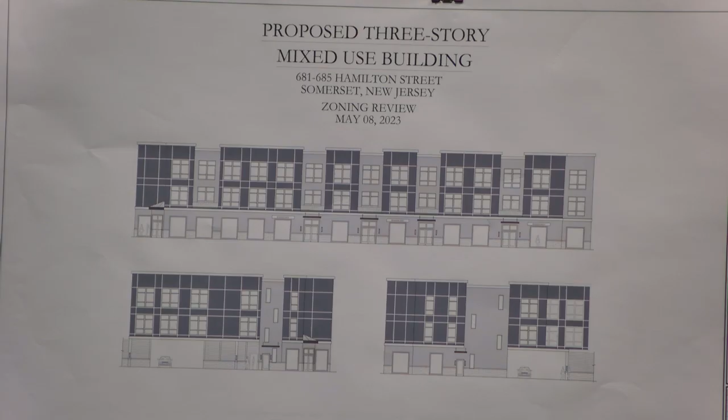Let me pause there for stormwater utility improvements. One of the reasons it took a long time to get here was that my client and his engineer worked very closely with your staff and engineer to hopefully resolve an off-site stormwater management problem, and we think we've done it. The hearing was deferred until we took care of that, and I believe we have.

The applicant is also seeking 2 bulk variances, the first for parking lot setback. The zone requires a parking lot setback of 20 feet. It varies with respect to the site constraints that we have, and I think it goes down, at at least one point of the property, to 0.5 feet.

We're also seeking a C variance, or bulk variance, for the buffering requirements from Schedule 6. That requires screening on the north side of the property, which abuts a residential property boundary, and you need at least 5 feet in width. We simply don't have the room, and you'll hear testimony from our planner.

I intend to introduce 3 witnesses tonight. My first witness will be Ashraf Ragab. He's from Amarch Design Studio, and he's the applicant's architect. He has a digital presentation of about 7 sheets, which we'll mark as Exhibit A1 when we get there.

It includes what we believe Mr. Healy wanted with respect to a 3-dimensional view, a rendering if you will. That's a portion of the plans. It's absolutely similar to the plans on file, floor plans and elevations, except we were going to eliminate an elevator, but we're putting it back in because of ADA requirements. You'll hear from Ashraf on that issue.

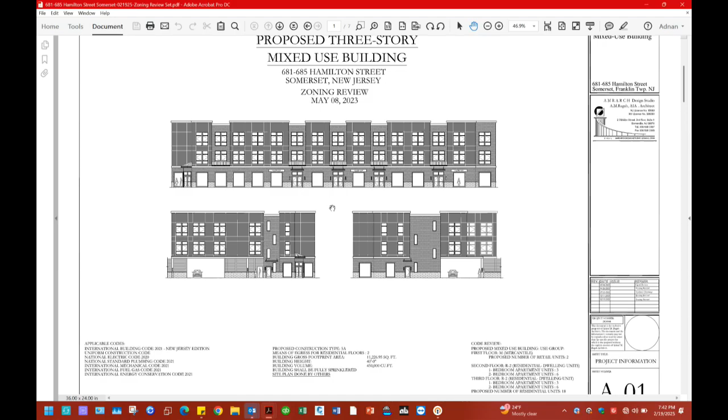Ashraf, you've indicated you prepared this. How would you characterize Exhibit A1? These are the set that was submitted to the board for review, with the exception of the renderings, which were added in the last two sheets as requested by the planner review. There was one change we'll ask to be disregarded, the elevator. The elevator had been removed from these plans, but it will go back. So we are reverting to the original plans that were submitted, there will be no change in them. So to clarify, but for the renderings attached to this exhibit, everything else is the same and has been on file with the board? Yes.

So the building is a 3-story mixed-use building with retail and parking on the ground floor. There's a retail strip along Hamilton Street and a main entrance for the building. Behind the retail, there is a parking lot with spots for the residential units. There is an entrance from the parking lot into the lobby area, actually, from the parking lot you would have to go around to get into the lobby. There are also bike racks required by the township in the parking area.

There are 2 retail spaces facing Hamilton Street, and on the corner of Hamilton and the avenue is the entrance on a diagonal 45. Mr. Ragab, if you could refer to what page you're on as you move through A1. I'm on page A02. Perfect, thank you, I just want to make it easier for everybody to follow.

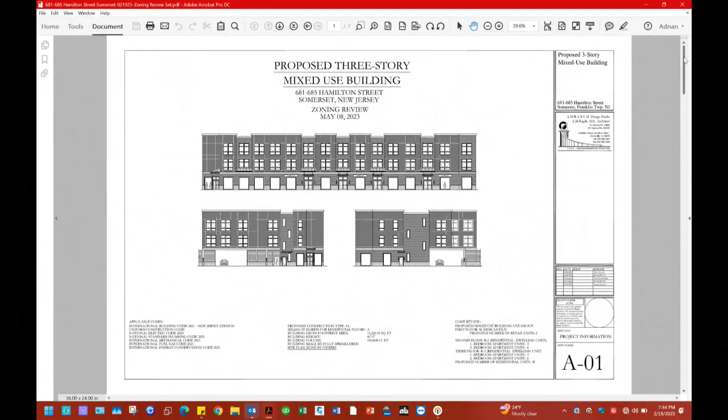The ground floor plan, that pretty much covered the ground floor. There are 2 staircases that go up all the way to the 3rd floor, and again the elevator will be there in the lobby. There is a trash room facing the parking lot that receives trash from a chute going up to the upper floors, accessible from the parking area. There is a sprinkler slash mechanical room accessible from the lobby. There's also a package room and a laundry room, common for the whole building, facing Hamilton Street, accessible also from the lobby. The rest of the ground floor is the two commercial spaces. They're not designed for any particular use, pretty much vanilla boxes at this point, TBD on the tenant.

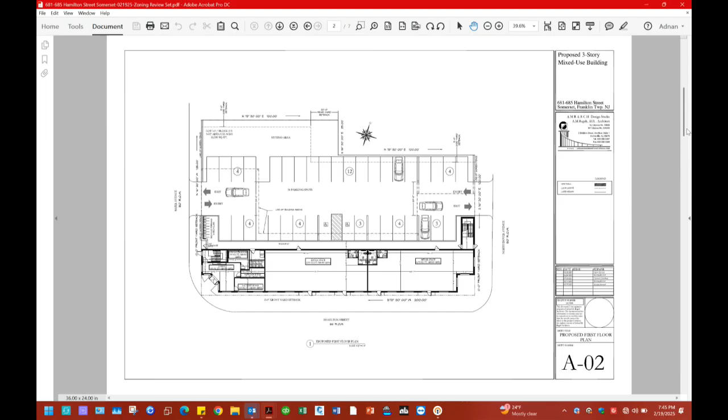Okay, you want to identify what you're referring to next? Sheet A3, A-03, which is the second and third floor plans. They're pretty typical, there's a single load corridor facing the parking lot along the L shape of the building, and it accesses all the apartments. There is a mix of 1 and 2 bedroom apartments, and again the elevator and the 2 staircases, one staircase at each end of that hallway. They're typical apartments, we try to make all units have a street view or exterior view from all the rooms, except maybe one exception. All living spaces and bedrooms are required to have windows, and the living spaces all have windows. Along Hamilton Street all living rooms have window access on Hamilton. Along the sides there's only 1 unit tucked into the corner where the living spaces are windowless, but the bedrooms have a view on Bear.

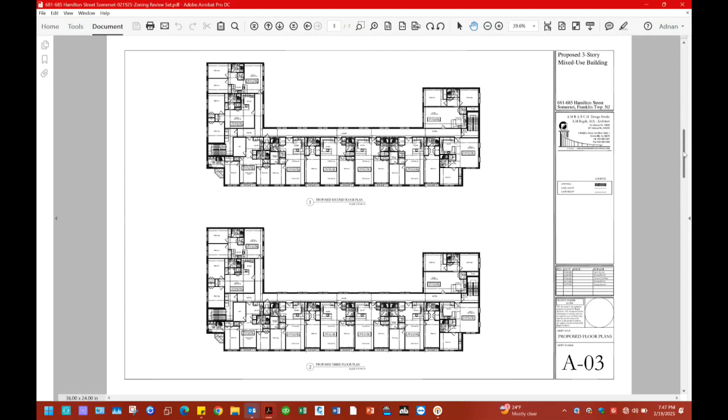Now we're moving to A-04, which is the elevations. There are retail storefronts along Hamilton with entrances for the commercial spaces and the building. We try to abide by the redevelopment zone standards for the elevations, the height, the changes in the parapet, so as to not create a single height building. We are using 3 materials as stipulated by the redevelopment zone: brick, cement fiber panels, and some stone at the bottom as a base. The elevations are consistent all around, there's not much change in material or color from all 4 sides, also as stipulated by the redevelopment zone. We are screening the parking lot at the ground floor with a masonry wall about 3.5 to 4 feet high, and the rest with slats that are semi-transparent, so you can see inside the parking lot, but it is screened for security.

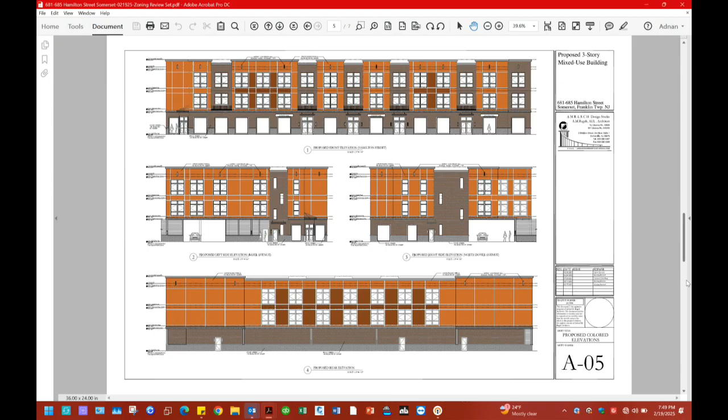Sheets A-6 and A-7 are color renderings, requested both by Mr. Mazzai, the board's consulting engineer, and Mr. Healy, the board planner. They show the massing of the building along Hamilton and along the two side streets, and also the parking in the back. The parking entrances and exits are side to side along the two side streets, and there is two-way traffic from Bayer to North Dover, with perpendicular parking on both sides.

And the parking is screened all around. There's going to be a solid fence. The site engineer will testify to that on the back of the property, and the screening is along the two sides from the street sides.

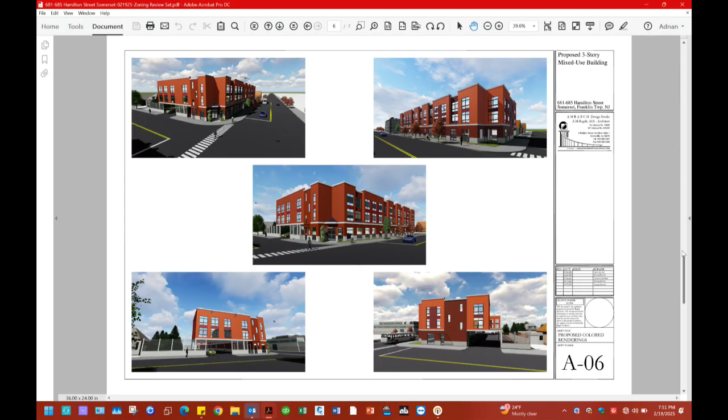How does this compare, the projections that you've just indicated on A-06, how does this compare to the remainder of the HBD district? Are these better presentations? We'd like to be, we're trying to be consistent with the HBD regulations.

A-7 are just additional renderings. In the parking lot, there's an aerial view of the building showing the parking in the back of it. And also there is a street view of the facade along Hamilton.

Mr. Ragab, are you familiar in your capacity as the applicant's architect with the Hamilton Street Design Standards? I believe so, yes. And do you believe that the presentation you're making tonight and the plans on record are consistent with the Hamilton Street Design Standards? Yes, and we are willing to add whatever enhancements will be requested. So we will be asking for no waivers in terms of the HBD standards.

All right, and these were referenced in comment number 2 to Mr. Healy's February 4th, 2025 memorandum. Is that correct? That's correct. Now, what about his comments with respect to architecture on page 4, the elevations, the screening wall design, and the attached light fixtures?

Sure. We're now referring to Mr. Healy's February 4th, 2025 memorandum, specifically on page 4, beginning with his other comments.

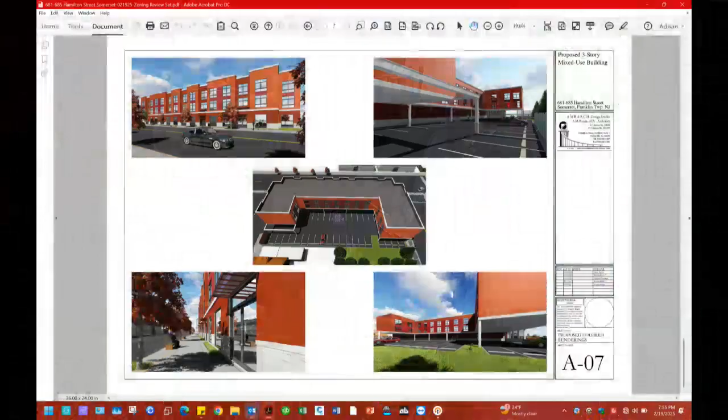And the applicant would like to defer a decision later as to whether they would actually install solar panels. It would depend on a number of factors that may exist in the future. Yes, the roof will be ready for solar panel installations. It will be a decision of the owner to install them.

All right, once again, Exhibit A1 is exactly the plans that are on file with the board, except it did not show an elevator, and we're now reinstating the elevator. That's correct, because of the ADA requirements. Yes. Okay, I have no further questions of this witness.

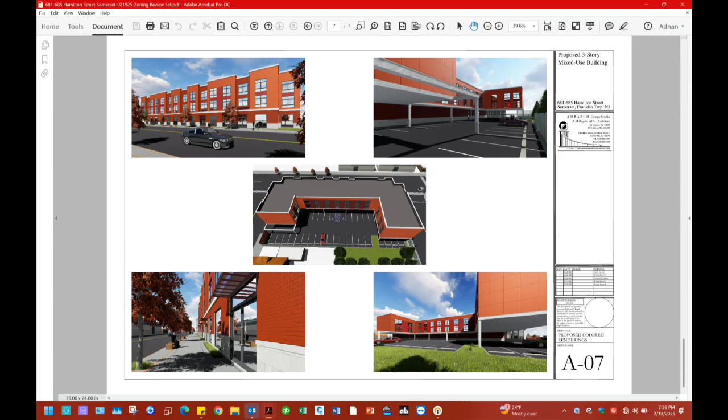So Frank, if I could just ask you to have him get a little bit more specific. Sure. As far as the similarity with 789, what I heard was there'll be different colors, different materials. Yes. Can you provide a little bit more detail on what that means? How do they differ and how are they similar?

I reviewed the design for 789. The windows are similar, but the treatment of the facade is not. I believe 789 has some vertical metal panels, or something like that, and the spacing of the facades is completely different. 789 has a different design for the units where the living and dining areas don't have windows - only the bedrooms are on the facade. While this one, all the units have windows on the facade, from living as well as bedroom spaces.

Both are single-loaded corridors with apartments along the perimeter, and both have parking underneath the building. So there are similarities. The storefronts are different from both. 789 has a lot more glass on the first floor than 685.

It's quite different. I mean, massing is similar because of the height restrictions and because both are 3 stories with retail on the first floor and 2 floors of apartments.

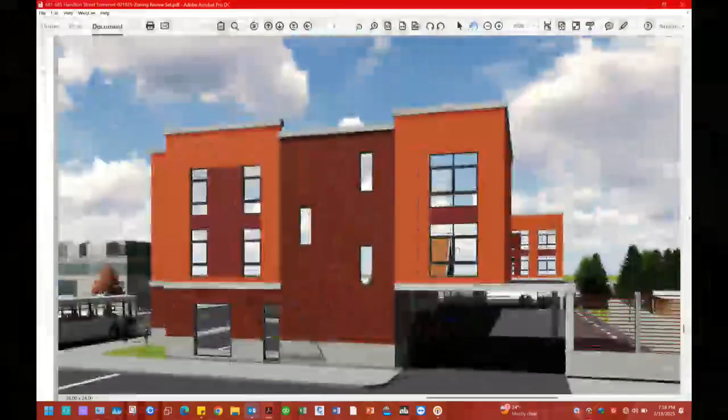That's the one, right-hand corner, this one here? Yep. Okay, can you explain what's proposed? It looks like there's just a building. What orientation, which street is this facing? This is facing North Dover.

The brick facade with the vertical windows is the staircase that goes up to the 3rd floor. The 2 cement fiber panel areas are the apartments. The window treatment is different for the stair because they follow the stair as it goes up, and the rest of the facade is pretty typical, similar to the Hamilton Street facade.

Okay, but structurally, you have - I'm going to call it a cantilever. Is this the steel column structure? Yeah, and then the building is only over part of that. Yes. I think it's unorthodox, I don't know how else to say that.

And I'm wondering, if you're driving down North Dover, is that going to, frankly, look odd? Well, we're not structural engineers, so we haven't designed this building by a structural engineer yet.

So there are two options: either to cantilever this full portion of the building and move those columns to the left side of the parking, instead of the two columns being on the right side. We can't put them in the middle, under the building, so they'd have to be at the end of the cars, either on the left or the right side. For now we put them on the right side, because that's easier than cantilevering about 20 feet over the parking. So we're just putting the two columns and the beams to support the building, but there will be no structure other than that.

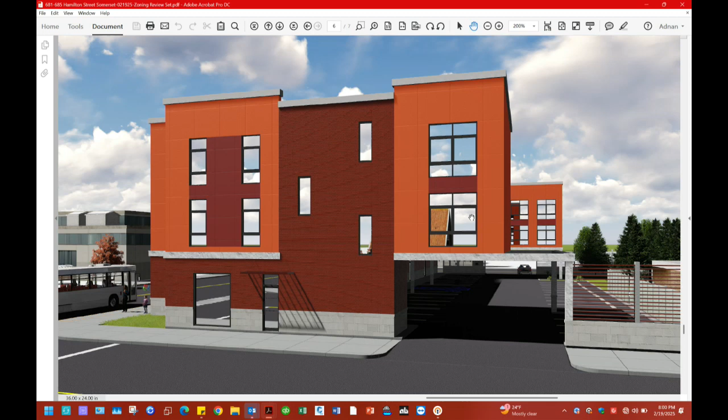Okay, and then I don't know if the board - I'm just bringing these to the board's attention - can you go to the other side, the lower left-hand corner? Can you bring that up and describe to the board that screen? That is the screen of the parking lot. Can you zoom out?

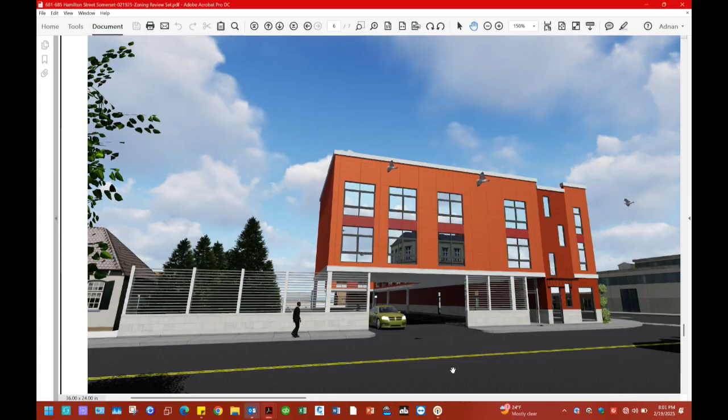So I raised this in my report. Why does it go the full length of the frontage beyond the building? Just for consistency purposes, but we could stop it at the building only and then revert back to a 6-foot screen.

But Mark, in your report, with this screen or fencing, you referred to the fact that along the parking lot it could be damaged, so you would prefer. No, that's a different area. Different area? Yeah, this is along Bayer. Okay, yes.

And I'm not sure what the purpose is, and it looks strange to me. It looks odd, and I don't know necessarily why it's being proposed.

The fence you're referring to is the one on the rear that adjoins a residential property. I don't think just placing a vinyl or wood fence is going to be a good long-term solution, because the parking lot has a 0.5 setback, so it's going to get damaged. We'll definitely have to discuss that, but probably with the engineer, not the architect. The next witness, our engineer, would be prepared to answer that question.

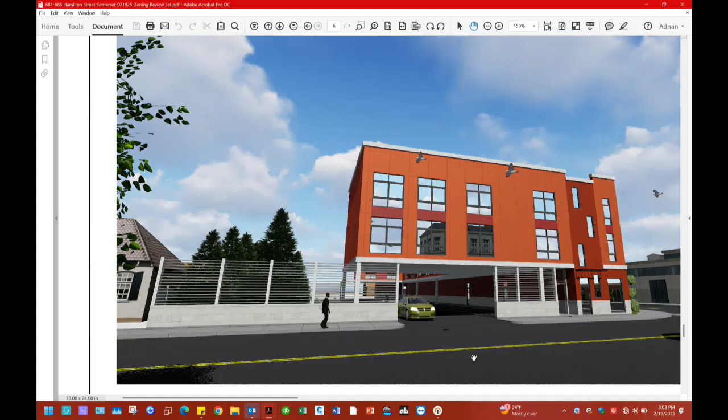My opinion is similar to Mark's. I hate to say it, but it looks a little prison-like with the metal bars. It could be something nicer there, just landscaping or something. It looks very sterile. I think one thing that could be done is to use several different colors on the facades. The renderings you have just show everything in brick red, which makes it look more prison-like, or at least very uninteresting.

If you have a more or less black, a more or less white, and one color, it would look a good deal better. I was just this morning in Princeton, where there are new apartment buildings going up next to the shopping center, and they've used several different colors - a sort of black, a sort of white, and a medium brown, wood-looking brown. It can be done quite attractively.

I don't know, since it hasn't been built yet, what the facade treatment of the other building, the 789, is. But I think what Mark is saying is you want the facade treatments of the two buildings to be fairly distinctive, fairly distinguishable, so nobody goes in the wrong building, at the very least.

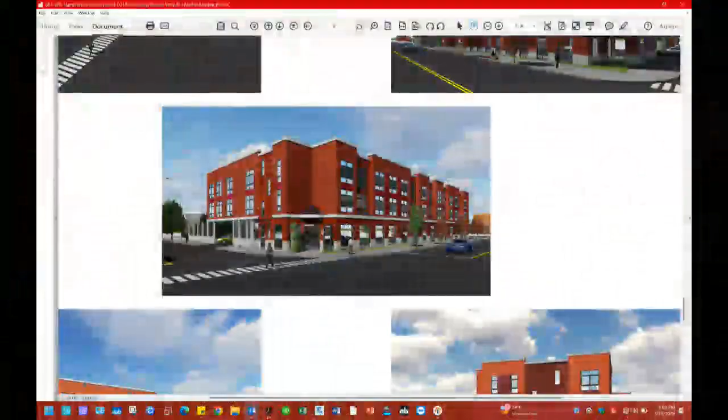Mr. Chair, I have one more comment. On page A06, if you can go to the middle rendering that shows the corner—well, there's two corners—the design standards, and this comment applies to both corners, talk about trying to do some kind of special architectural treatment at corners.

I don't necessarily see that here. If anything, I see blank walls. Did you consider this design standard? It even says you could have little tower features or something to kind of emphasize the fact that it's a corner.

The issue here was we actually cut off the corner because of the sight triangle, to allow cars on the side streets to have a little bit of visual of Hamilton before getting into the intersection. That's why the corners are cut off. We would have loved to put a tower there, but I think it would have impeded the visual. We could look into putting a tower on the upper floors and leaving the ground floor on a 45 for the sight triangle.

We did the same on both corners—cut them off a little bit to allow cars coming out to have a better sight triangle. But we could look into doing something above the entrance, up to the roof. I'm not against that.

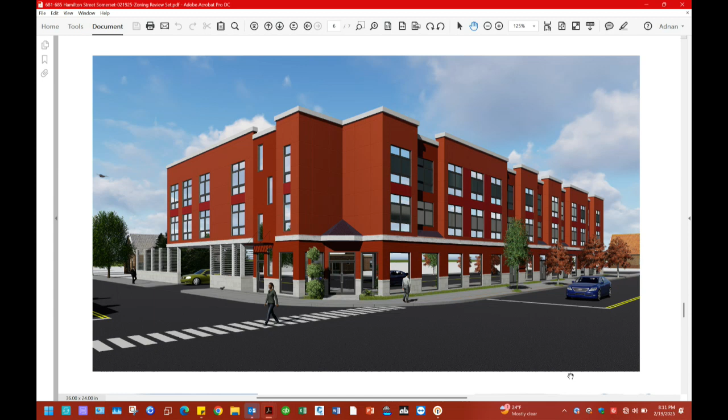That's all I think we should do, because none of us have day jobs doing this professionally—we're just giving feedback. So I think your feedback is reasonable, Mark, and the applicants indicated they have some flexibility with regards to architectural treatment. But that will have to be worked out with staff professionals. Absolutely—we certainly adopted the HBD standards for a reason.

Okay, any other questions for this witness? Certainly, he'll remain sworn in for any future ones.

Bob: just have one question in general, I guess. If you're going to do something above the roof on the corner, vary the colors a little bit on the entire building, adjust the fencing a little bit—how far along are we going to go before we're approving something that we haven't seen? Those are pretty all-encompassing changes to the appearance of the building.

Well, the design is pretty much the same. The fence is a treatment, so we can revise the treatment of the fence, and we can get something worked out.

Okay, I'm sorry, that really wasn't a question for you. Does the board want to have an opportunity to see the changes and approve them, or is it all going to be left to discussions with staff? I appreciate the question, because yes, there does come a point where, again, you approve something and then it's staff's job to make sure—but at some point it becomes something you need to see. You can't just defer all of it to staff.

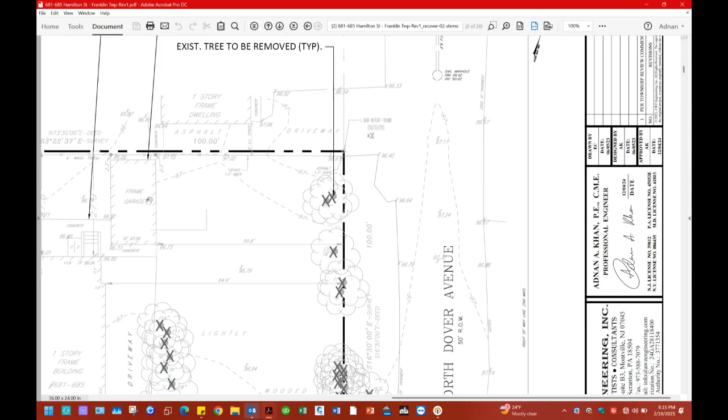Explaining some of the reasons for the delay getting here, there was an intervening point in time where you met along with our client and the township staff, predominantly Mr. Mazzei, regarding an issue on off-site stormwater, and you believe that's been resolved? It has been resolved, yes. There was an issue with the neighbor getting stormwater runoff, so we have to make some improvements to the applicant's adjacent property as well as on the street, to Baier, and all the way up to the neighbor's property. But it is my understanding all that design work is complete and is accepted by Mr. Mazzei.

Did you review the January 22nd, 2025 report issued by Darren Mazzei of CME? Yes, I did. And what are your comments with respect to that? There are not many comments, it's mostly housekeeping type comments that we don't have any issues with, we will address them, we will work with him. We have a very good relationship, he was very helpful in addressing the stormwater comment issues with the neighbors. So I don't see any issues, and we will comply with those. So to word it slightly differently, are there any points in the CME report that you wish to discuss with the board or that you feel you cannot comply with? No. Okay, all right, excellent.

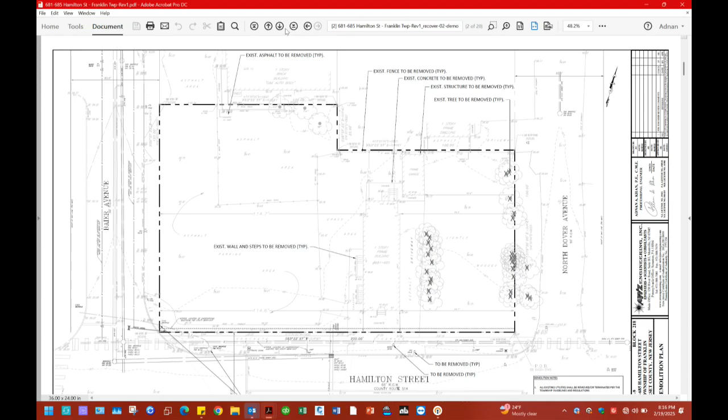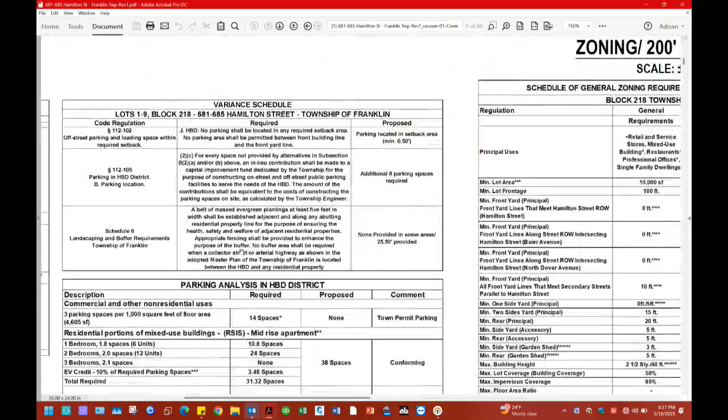Let's talk a little bit about parking spaces and the EV spaces. How many parking spaces are required under the ordinance? I'm looking at our site plan, dated December 4th, 2024, sheet C-01, where we have a parking analysis breaking down parking based on commercial use and residential use. For commercial, based on square footage, we are required to have 14 spaces. For residential, between 6 one-bedroom and 12 two-bedroom units, we are required 35 spaces. However, this project qualifies for EV credit, providing EV parking spaces and the associated credit that comes with it, so once we do the math, the parking for the residential component goes down to about 31 to 32 spaces. We are proposing 38 spaces, so the additional 6 spaces, if we count towards commercial, we are short 8 commercial parking spaces.

That's an interesting point. There was a point in the Environmental Commission report that said you were over spaces, probably as a result of that math. However, if you didn't put in as many EVs, you would be well under the parking required from commercial and residential, just taking out the EVs. So I think you're in a sweet spot where you're providing enough EVs, not over parking, but not under parking either. That is correct, but the EV number is dictated by the law, what percentage of required parking spaces must be EV. By the regulations, we are required to provide 6 EVs. But yes, you are correct, we are over, and as far as the residential component, we are exceeding the requirement for the residential part.

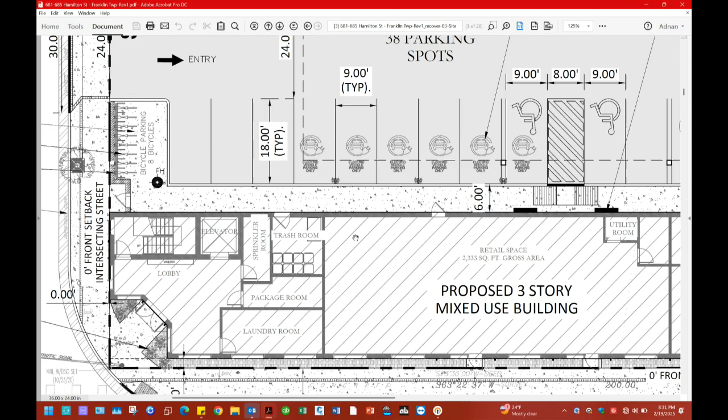Yes. How's your retail trash being handled? That's going to be handled by the tenant, whoever will be the tenant. But I mean, where is it? They will probably, depending upon who's the retail store owner, have bins within the store somewhere, partitioned off. But there's not going to be an external dumpster or anything like that? No, not for them, no.

Okay, and of course, you'll comply with all the other ordinances, including the applicable Affordable Housing Development Fee Ordinance? Yes, that is my understanding. Okay, I have no further questions of this witness.

So can we talk, and I know your planner will probably testify as to your reasoning for the variances, but can we talk a little bit about those setbacks and the buffering? Sure. There's a couple of ways to deal with it, various extremes. But I come to, in my opinion, at an absolute minimum, the applicant needs to explore an aesthetically attractive and durable means of providing screening.

Because along a lot of the site, you're only at a half a foot setback, so you're not going to be able to put trees or anything in there. So how would you comply minimally with the proviso that the board may say, well, you've got to comply with what it is, and the setback's going to have to be greater, you're going to have to do something with the size of your building. But given what you're proposing now, how would you address that comment?

Okay, I think the setback that is in discussion, or the variance required, is this rear yard setback. And again, as you know, this is like a three-sided lot with three frontages, and the shape of the lot is not a perfect rectangle, so the hardship that is being created is in this section.

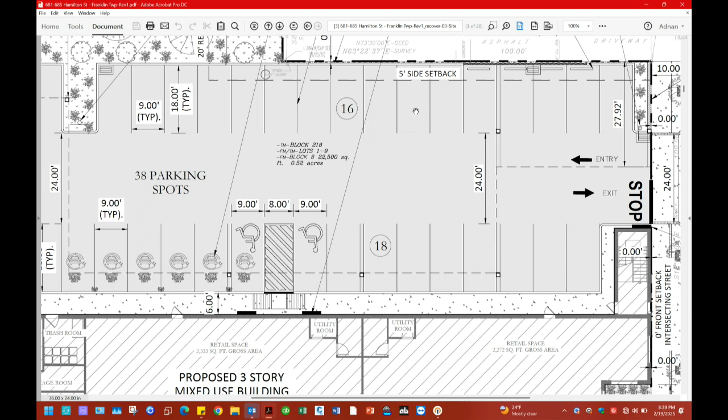I have a suggestion. I like the suggestion of the solid masonry wall that you said was 4 feet. If you make a wall like that, chances are you have a flat top on it, and maybe you could put some kind of decorative feature across the top of the wall that would sort of soften it a little bit.

Use the 4-foot solid masonry wall. Put some kind of, for want of a better term, decorative piece across the top, like a lattice, so it becomes maybe 5 feet high, but it doesn't look like just a big solid, massive brick wall - something a little decorative with it.

And that block wall we're talking about can be a decorative block itself with a pattern to it, rather than a CMU type wall. And then, yes, a lattice on the top can be done as well.

I have another suggestion. It's not perfect, but it would make things better. You've probably seen parking lots where there are diamond-shaped spaces that extend slightly into the parking spaces, but a car extends further forward than its tires, so even if you hang over a little bit into those diamond shapes, you're okay. You can still use the parking space, but in those diamond shapes, trees are planted. I believe this was invented by Bruce Hamilton of our Department of Horticulture at Rutgers many years ago. But if you had a sort of half diamond extending in right at the borders of the parking spaces, you could plant something in that half diamond without functionally losing the parking space in any way.

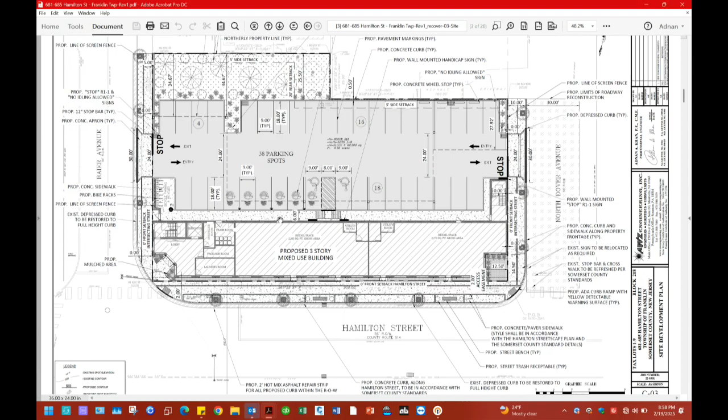They don't necessarily have to bring a dump truck. They can bring a Ford-mounted 150 or 250 with trash handling mechanisms, and just pick up and dispose of the containers there. So that's what's going to happen at this site. And again, the first couple of months, they will know more accurately the frequency needed, because they're putting up this beautiful building and don't want trash to accumulate on the property.

So they will adjust that frequency if it needs to be made more frequent. Probably the manager would put out what we'd call garbage cans, though they'll look better than that, on the Baier Avenue curb, and the truck will come along - I see John shaking his head madly. I'll talk about it, okay.

There are two ways they can do it, depending on the equipment the waste management company wants to accommodate with this site. If they're bringing a smaller truck, like the Fords or Dodges that are equipped, they can drive in through the driveway, stand in front of the trash enclosure, bring the bins out, empty them, and leave. If there's bigger equipment that can't meet the ceiling height of the building, they have to park by the curbside and the trash has to be brought out. That's something that will be evaluated during the first few months of operations.

We have a great retail frontage along Hamilton Street. We have high-quality access points, clear and defined entrances for our different uses. Our parking is around to the rear, half of it inside underneath the building, the other half is screened. We can certainly discuss the method of that screening, that's a great conversation to have. I think the board has given us good direction on how to address that buffer adjacent to the residents there, and I agree it's very, very important. But our bones are very good.

The second part of it is our materials are very good. So we have brick, we have fiber cement siding and fiber cement board, and we have stone. So we have three high-quality materials. We can certainly refine them in ways that would be more acceptable to the board, make sure we don't copycat onto 789.

I would love if we copycatted on 695 next door, because frankly, I think that's the most attractive building in the Hamilton Street corridor. That building is owned by my client. So when I see how that building is operated, it gives me great comfort that this building will be high quality and operated the same way.

So in terms of all the Hamilton standards, we meet them by and large, except for two matters of relief. One is for the buffer requirement — 20 feet is required to the adjacent resident, and we are proposing 0.5. The board has said, and frankly, rightly so, that's not enough.

So we believe that by shrinking the parking spaces and the sidewalk adjacent to the building, we can provide an additional 3 or 4 feet along there, combined with Mr. Chase's suggestion for the diamonds to provide potentially additional area to plant something a little larger, combined with extending the masonry wall around that side of the building. Again, good fences make good neighbors, good walls make good neighbors. But a solid masonry wall makes a better neighbor than a vinyl fence that's going to get damaged.

Thank you. Mark, I want to call on you, you're our planner — what's your opinion on the planning testimony you've heard tonight versus what the applicant's willing to do to meet your requests for buffering and setbacks?

It's a good question, and I don't know if I can necessarily answer it for you. I think some things like the buffering, if the board was satisfied with what was discussed tonight — for example, if the board approved subject to making the sidewalk 4 feet, making those spaces compact — but I'm not talking so much about that, I'm talking more about the C1 to C2 criteria. Respectfully, I do appreciate your planning testimony that we could grant preliminary and final tonight.

The pulse of my board is that we have been burned before in the past by trying to engineer certain things, which is why I prevent the board from doing it. We'll give you our feedback.

I'm not entertaining final tonight because I think there are too many variables I'd like to see, from color treatments to walls to setbacks to whether we can get 2, 3, 4 feet, all of that stuff. I'd like to see a final plan to know exactly what we're getting. I know there are veterans on this board who can tell you that when we've failed to do that in the past, we're often driving by these projects wondering what the hell we approved.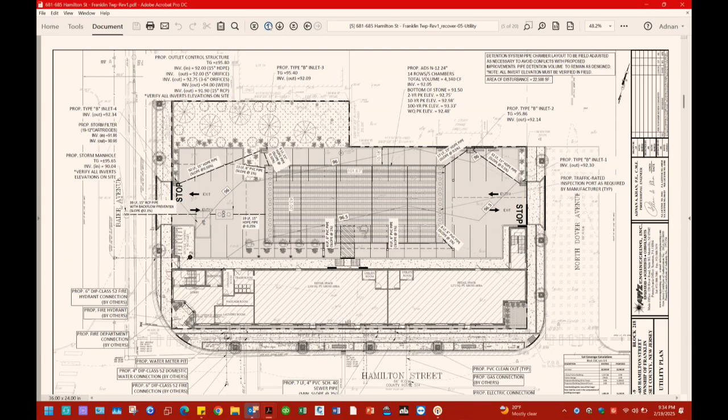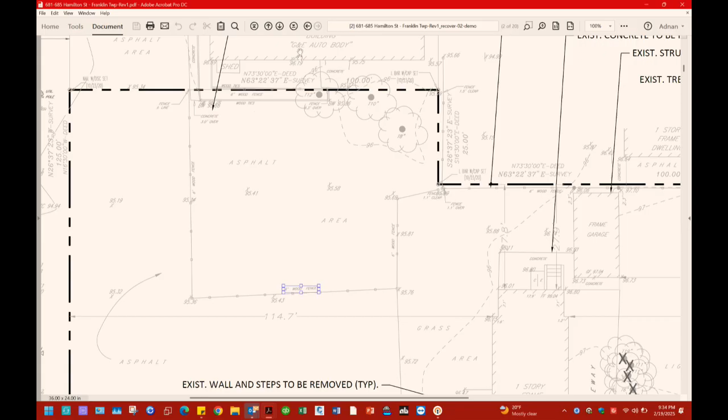It's about 1.5 foot difference in the back. In the back? Yes. So now my question is, because right now, there's an issue with runoff water going downhill from the house right next door to the garage.

So my question is, when you did that stormwater management or whatever you guys want to call that term, does that catch that water coming down that hill so that it doesn't run into anybody else's driveway, anybody else's house? Is that getting caught by a catch basin or something going to catch that water? Or is it just going to keep running down the hill? Because that's part of the problem that we're having over there.

So unless you're telling me you're going to put a curb halfway down the block to keep that water from channeling in, then there's going to be an issue there once everybody else leaves and they grant all these preliminary injunctions and everything. What are we left with? So that's my first question. Let me answer that before you get to the second one.

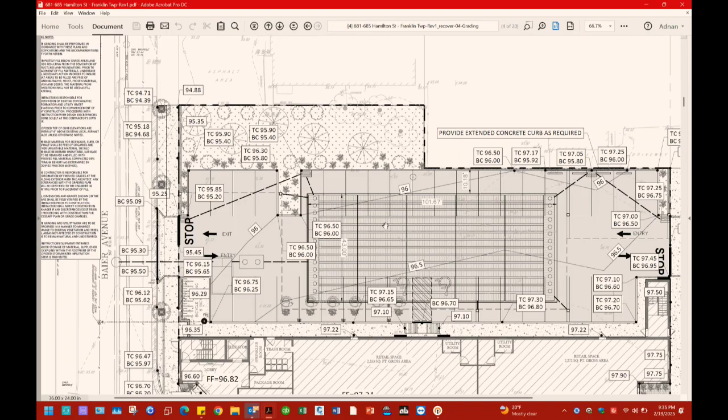Second one. Now, how's that light work into the houses below? What type of buffering are we talking about? I mean, let me answer the first question.

Right now, the way the property exists, everything slopes towards the back. There is no stormwater detention on the property. Whatever surface runoff there is just goes either to Baier Ave, or to the rear of the property. What this project is doing—first of all, we have a building, and then we have a parking lot. The parking lot has a curb all around, so any water that will be either generated from the roof or from the open parking area will be collected into this underground detention system.

So you're eliminating 85% of the runoff right off the bat, right there. And what about the rest? The rest is all landscape. That whole area will be landscaped there, and it will be pervious, so it will be absorbed into the ground. Plus, the system we're designing reduces the 2-year, 10-year, and 100-year storm events from existing conditions.

2-year by 50%, 10-year by 25%, 100-year by 20%. So whatever you see now, first of all, we are containing everything, and then any discharge is going to be tied directly into the storm sewer line. In my opinion, you won't see a drop of water offsite. From a layman's perspective, if I understand our engineer correctly, you're better off with the project than you are today. Correct, in your opinion.

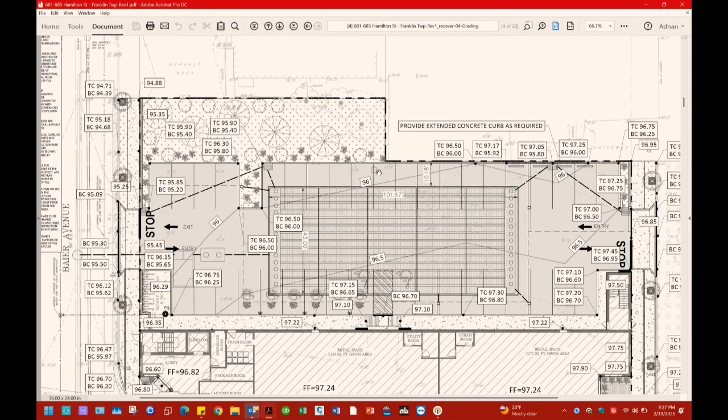My second question is about the lighting. I don't know how you guys want to explain it, but the cars are parked in the back of the lot, and when those cars turn around, the lights go everywhere. So you're going to improve upon the situation because you have new housing.

The board gets to say, you've got to come up with a new idea on how to protect the residents with the lighting and everything, okay? Now, someone mentioned, how's that barrier going to work? Trees, brush?

The way I see it, and again it's just a concept in my mind right now based on the comments, we'll have 4 feet. First of all, we have 20 feet and a good landscape buffer for half of the property to the west side. The other half, what I have in mind is we'll have a landscape buffer of 3.5 feet, then we'll have a wall at the end, at the property line, a 4-foot high wall.

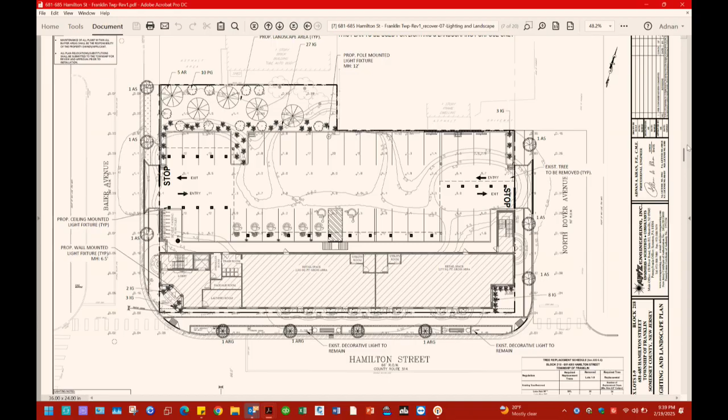Am I going to see any light whatsoever? Absolutely not, because usually whatever the average height does- do I see your lights coming to my house? I don't think so, because the average height of the light from an average car is 2.5 to 3 feet, unless it's an SUV, and we are proposing a 4-foot high wall there. Unless I've got an SUV, then they'd be above it. But that's unless you have a big tire, or they rigged it up with a big tire. I'm not going to see any of your light, that's what I want to know.

That's the idea, yes, that's all I want to know. Correct. It's not just light though, it's the cars slamming their doors late at night as well. Yeah, but again, we are also putting landscaping in front of the wall. So that landscaping will grow up and it will probably, first of all, block some of the noise element as well. And plus, over time, over a year or two, that landscape will grow and it will overshadow the wall, so whatever glare there is, you probably won't even see it.

Carl, just so you know, that's one of the reasons I'm asking them to come back with a final plan, because we've given them this direction, but we don't know exactly what it's going to look like. So it gives us another bite at the apple to say, what are you actually going to do to address our concerns? Yeah, and a thing that also bothers me on the side, some of my residents that were going to show up, because you say you don't have to notice this anymore, then they actually have to follow this on the website as to what's been carried, what hasn't been carried, what's going to be, they got lost on this one. Okay, so I'm the fall guy, I'm just catching questions as they come through, okay?

We did the lights, we looked at the barrier, you're going to come back with that, right? Okay. Parking - you know they're doing a traffic study on Hamilton Street, even though I think we're a couple hours late on that one. But we're looking at, are you giving these people, and you brought up the Hamilton Business District parking rules or whatever, are we giving each apartment 2 cars or each apartment a car and a half?